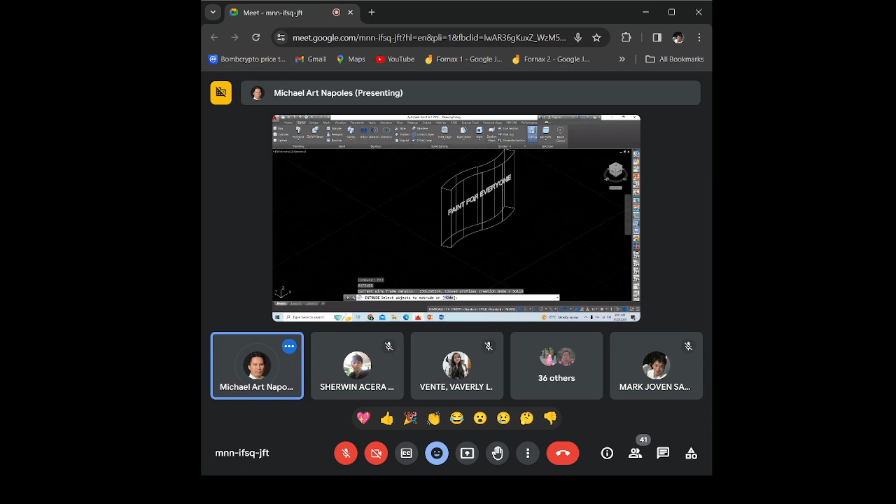Then next is, okay, so ato siyang i-extrude ang text. Okay, nakita niyo na extrude na ang text. Okay. Then extrude also this one. Okay. So, ang extrusion height, depende na sa inyo ha. Okay lang, basta lumampas lang.

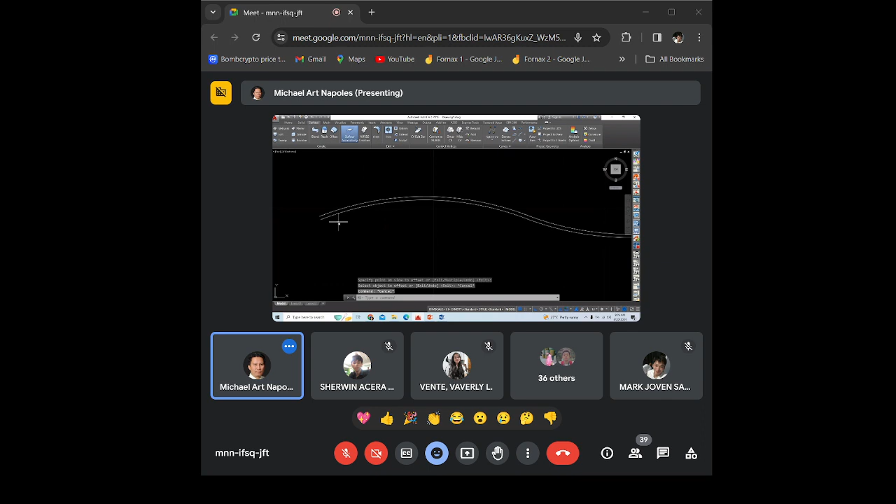Then we offset it. The offset distance is equivalent to the thickness of your emboss. Let's say 0.01. Okay, that one. So this is what we need. I'm doing it to move this one, but I won't click. Okay, you have to make sure it's aligned. Okay, let's go back to the southwest isometric.

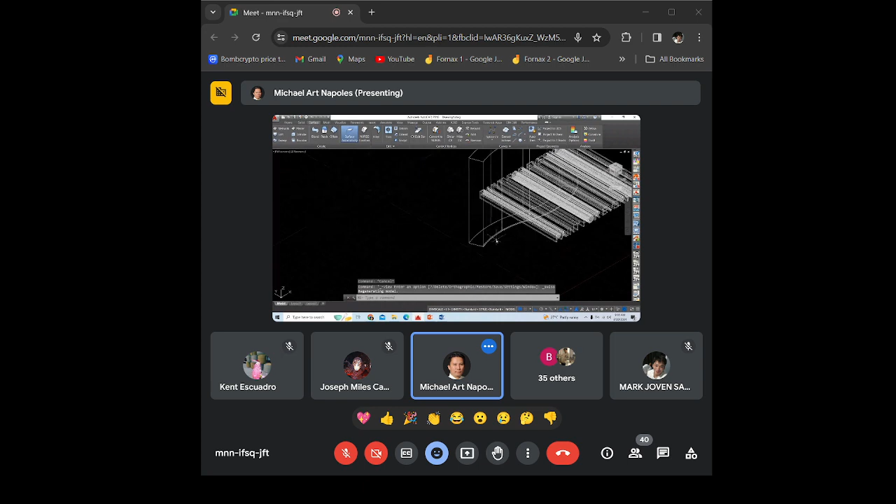Let's go to the southwest isometric. Let's change it to that. Take note, we'll use surface, not solid. We can't use it — you cannot apply slice if it's solid.

So select this, extrude it. Extrude this, going up. Okay, then let's do this first, then extrude the line going up.

So let's first cut the text using this surface. The surface was the first one created.

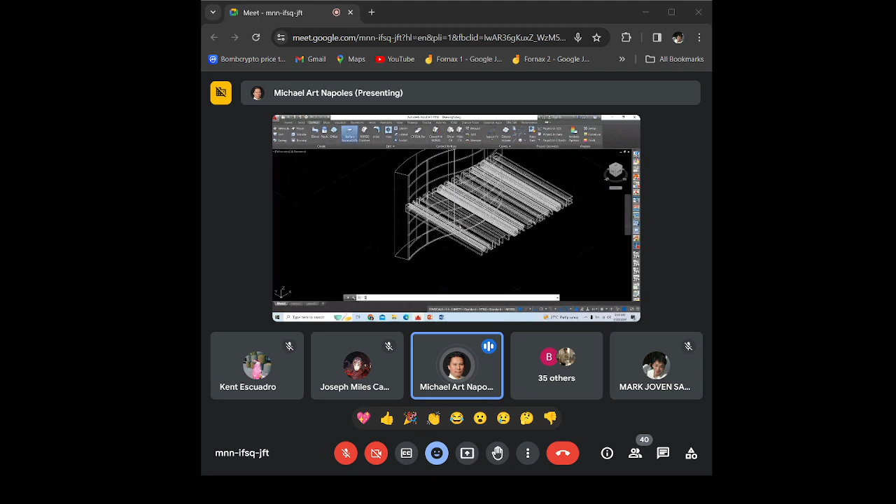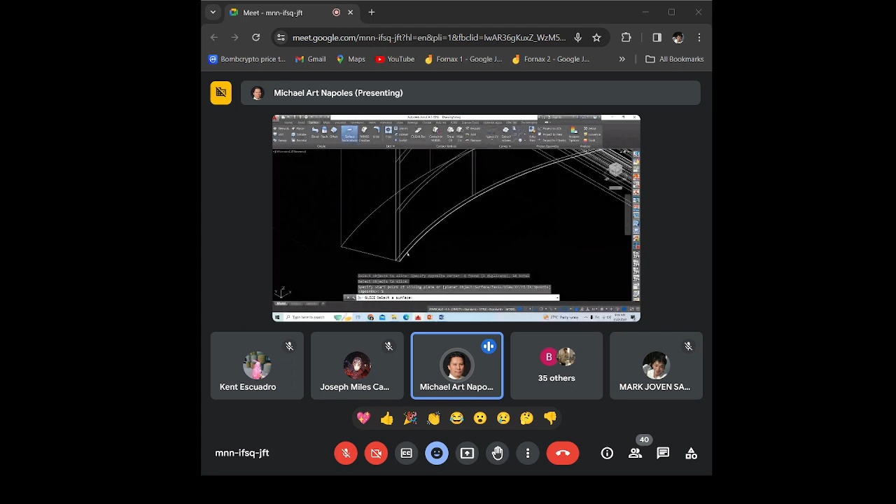Okay, so to get this side too. So, slice, select the text, enter, click surface. Surface is what we'll select, this one. Keep both sides, click until everything is cut. Then delete.

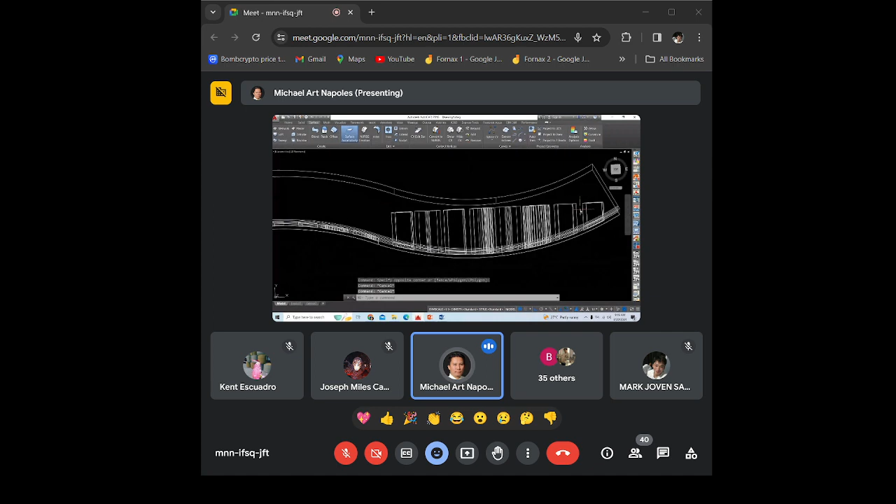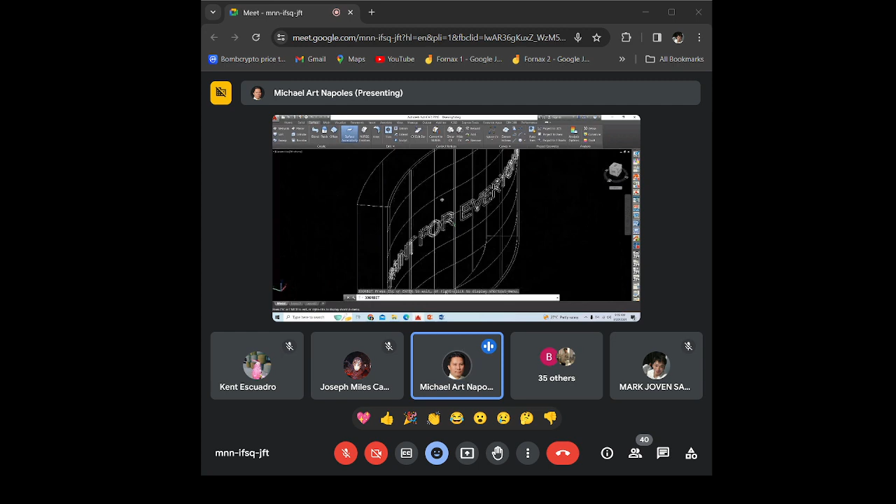What do you think is the final tool to use so we can engrave? Anyone? Hello? The final command to use so we can engrave. Subtract, sir. Very good. So, subtract.

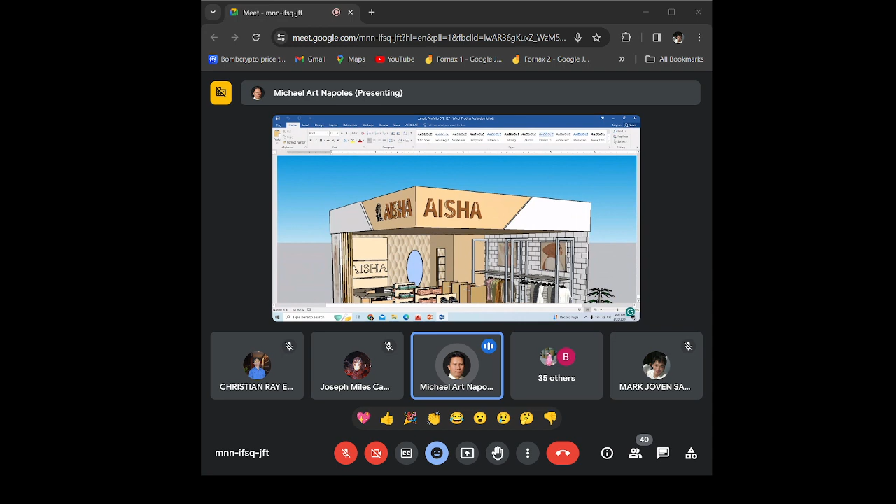Then, your logo should be embossed. Your logo should be embossed. Okay, so questions?

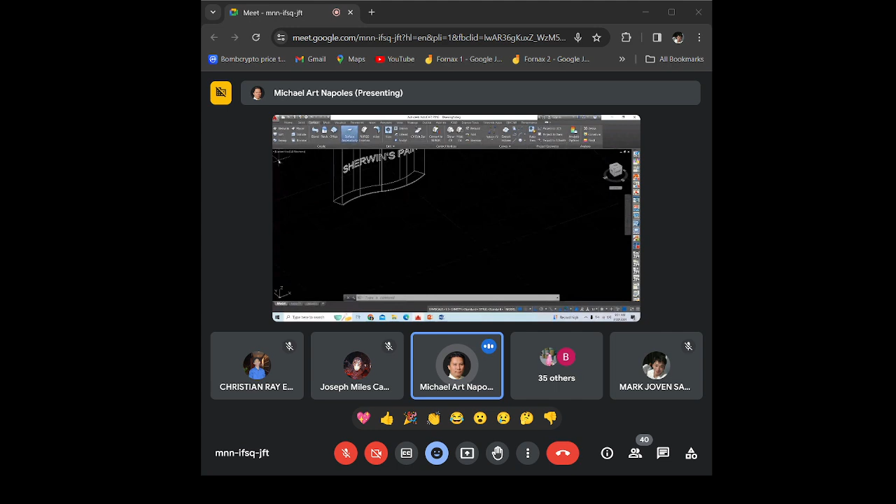For example, your drawer is this. That's the drawer. Okay? Your drawer. That's the- oops. Be careful, it's a surface.

Go back to solid. Then use extrude. Okay, for example this is the drawer. So it's hard, let's just subtract, right? It's still solid.

So how do we make this box hollow? That's how a drawer is, hollow. So first, let's copy this.

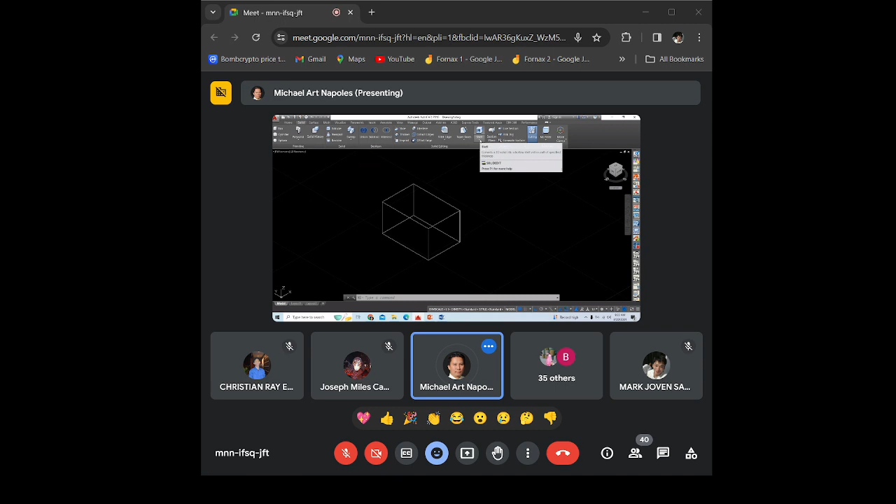No, let's shell it. There's solid, shell. Shell's function is like offset, right? But this is used only for 3D, for solid objects. The offset we used before is for 2D objects.

So, select the 3D object, then enter. Now it asks for shell offset distance. So, let's say for example the board you're using for your drawer is 3/4 inch marine board. 3/4 inches to meters is how much?

3/4 inches to meters is 0.01905. So, offset it to 0.01905. So offset to 0.01905.

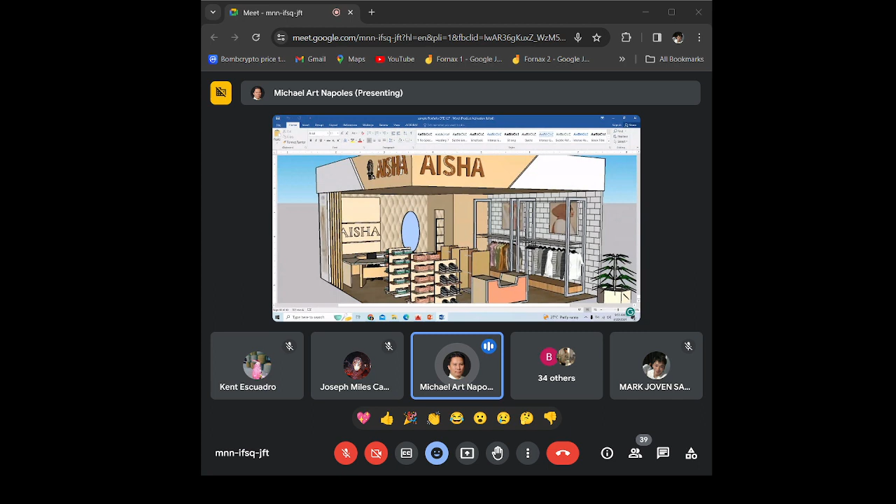3D warehouse. Have you tried uploading or downloading 3D components in SketchUp?